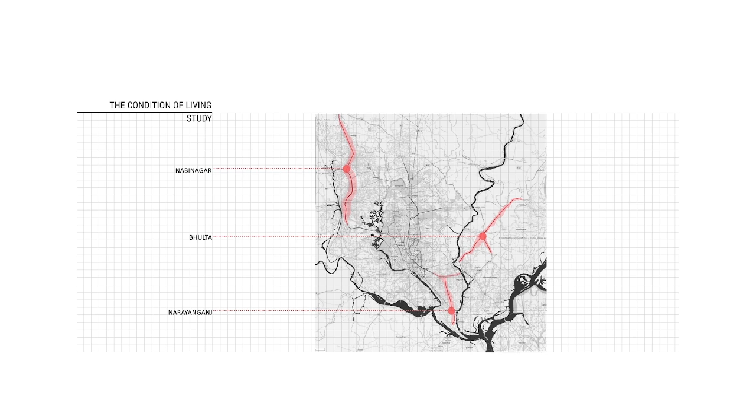After studying three main industrial belts, we can learn garments workers and their family members generate extra economy to maintain a better living condition for themselves.

If we consider the COVID situation, we can learn that about 40%, which is 1.6 million in number of workers, moved to their village for not being able to afford their living cost.

By studying their homestead, we can learn that several people are dependent on a particular garments worker, and they bear the monthly expenses and try to help out the family by involving in different works.

If we look at their economic pattern, their money goes directly to the market, which never comes back. We can turn this to circular economy for their economic growth.

If another unit is being proposed for extra economy, then the cost will arise. By sharing time-based use of those unused common spaces, they can be benefited.

Here, we can see what types of extra facilities they can have, how much space we need for a bed for 2 persons, and how much we need for other furniture. The answer is 11 feet 2 inches and 10 feet 4 inches.

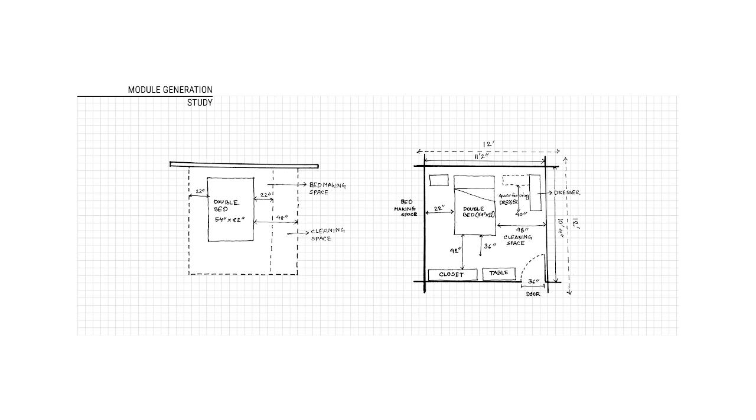To reduce the construction cost, we need to separate it into a 3 feet module, then the unit forms about 12 feet by 12 feet. Here, the panels for walls, windows, and doors are made of CI sheet because of the availability of these materials. Here, we can see the space of one unit.

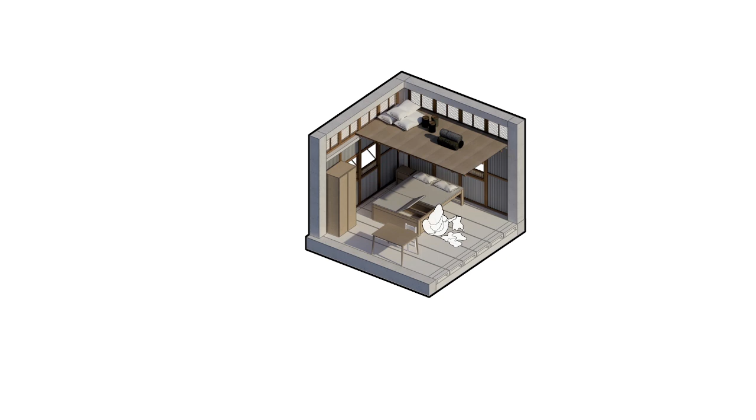Large storage space is needed for pandemic situations, that's why 2 layers of space are added. When 2 units are shared between themselves, some common spaces will be created which can be used for a different purpose. Floors are also considered as a module so that it can be made easily.

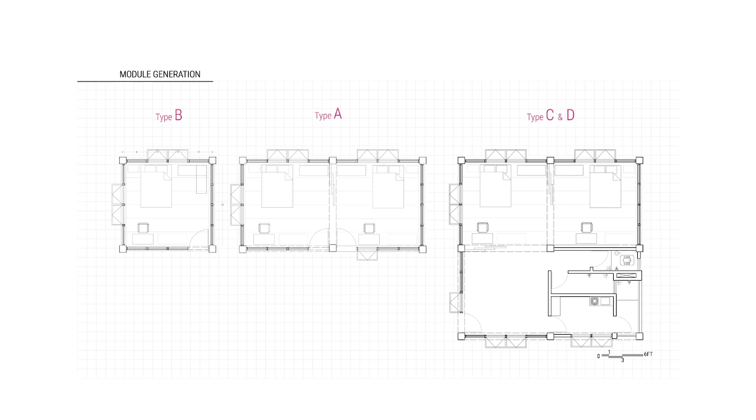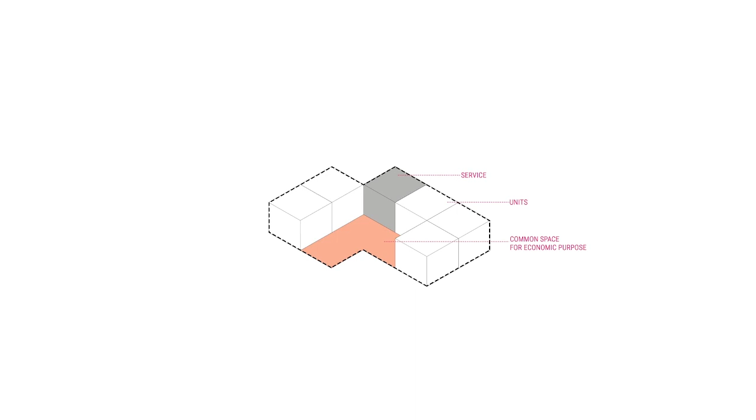Shared service is the central point so that the units can be arranged in the perimeter of this center to create some common space for economic purpose.

When they live in their village, there is some case of access from one house to another. That makes an easily accessible circulation. From this point of view, the vertical connections are here also made just like their native practice.

To generate some extra economy, here they sell their own sewing clothes. So there is some economic pattern, and the panels can be used as an extra economic pattern or source for them.

Now my site is located in a growing industrial belt and this belt is being served by this particular zone. In further, here EPZ and other garments factories can be increased in a huge number.

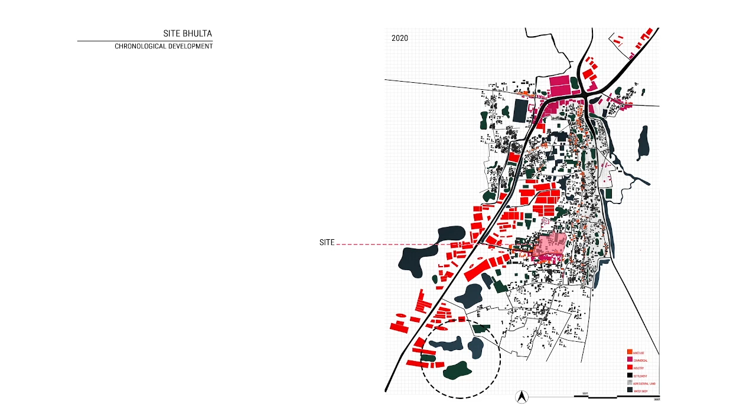This economic plan is the most important part of this project. Here we can understand what kind of role architects have in this type of project.

If it costs 100 crore taka to build the housing, the landowner can also go through a process by sharing the land with garments owners at 5% interest for 10 years. These loans will be given by JICA, IDCOL, or the Bangladesh government.

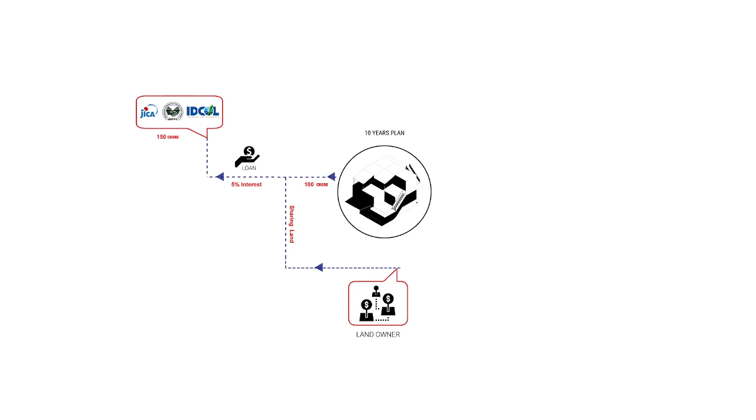But how can we pay this 150 crore taka? If we look at the worker house allowance, the monthly salary of 4 to 5,000 workers is 1.5 crore. It stands at 18 crore a year. From that 18 crore, we can take 15 crore in 10 years. The 150 crore taka can be paid.

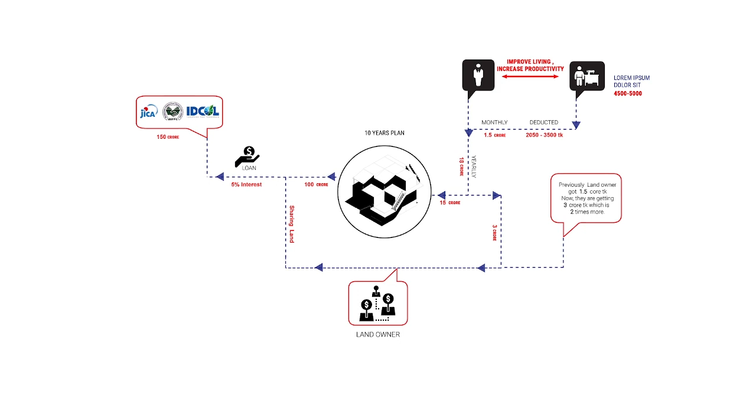The remaining 3 crore taka can be shared among the landowners. As a result, workers are getting a better place in their house allowance, their living is improving, and the garments owners' production is increasing.

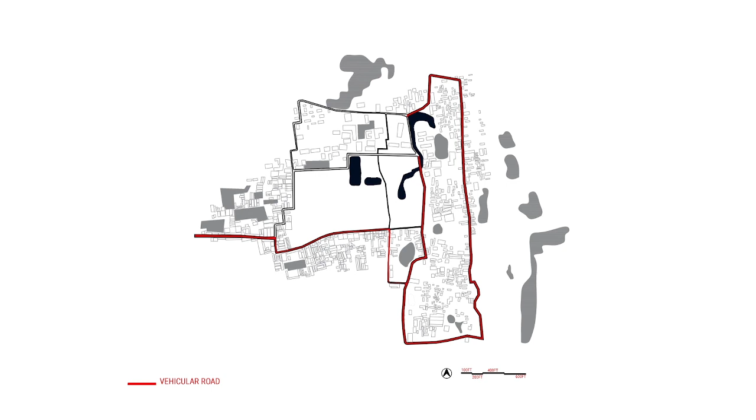We can see the vehicular accessibility around the site. The road has been moved around the site to increase vehicular accessibility. If we look into the Mouza map, we can understand the current road pattern and which places can be shared.

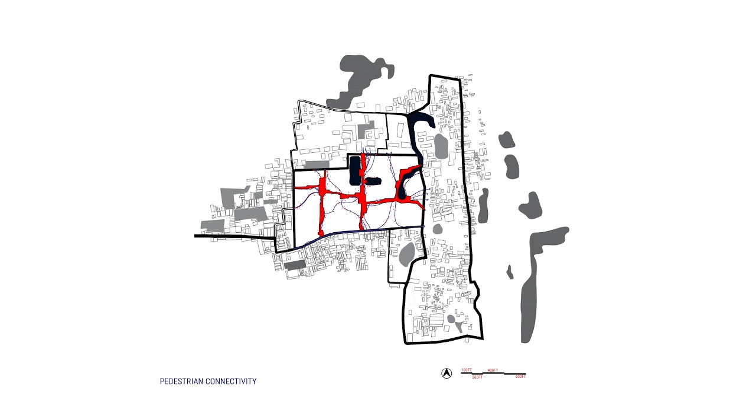From the study, we can see where people are gathering more and by which road they are moving. The main spine road is generated from that activity pattern. The activity pattern of the spine road can be seen here.

Later the modules are installed, and that's where my secondary road networks come from. This is the final stage of the master plan.

Let's take a look at the main spine road. Let's see what kind of activities are going on. We can see the connections in multi-layer, how the shops and living units will connect with the roads.

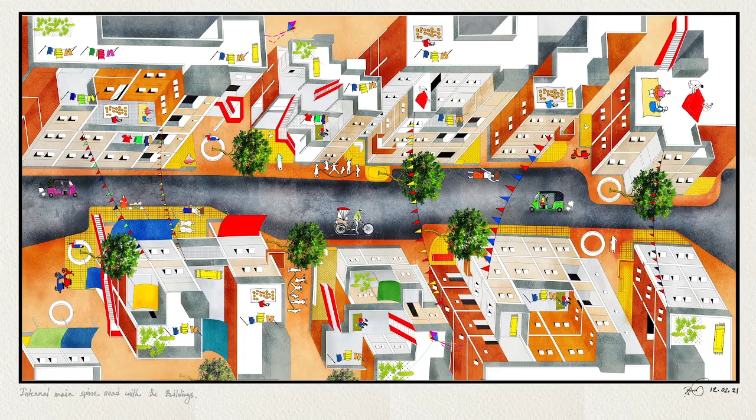Now we can see the axonometric view of a cluster. It shows how these roads are connected, how the economic zones are connected with the markets, how the multi-dimensional connection is taking place through the vertical connections.

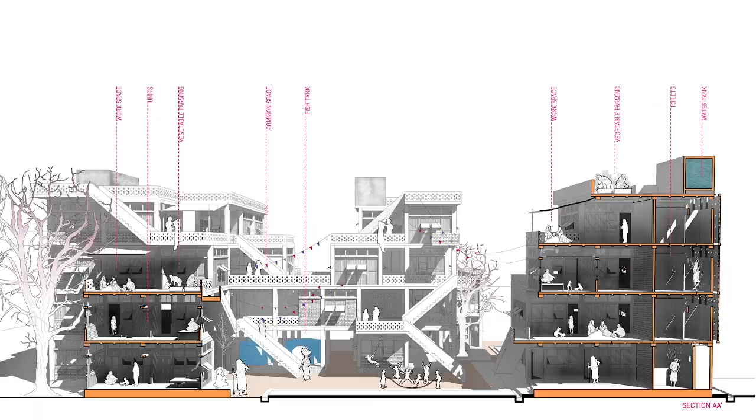In these sections, we can see the connections of workspace, living unit, courtyard, and vegetable gardens. Here we can see how the alleys are opening into the courtyards.

The open spaces are being used as playgrounds for children. They will be used as community space as well.

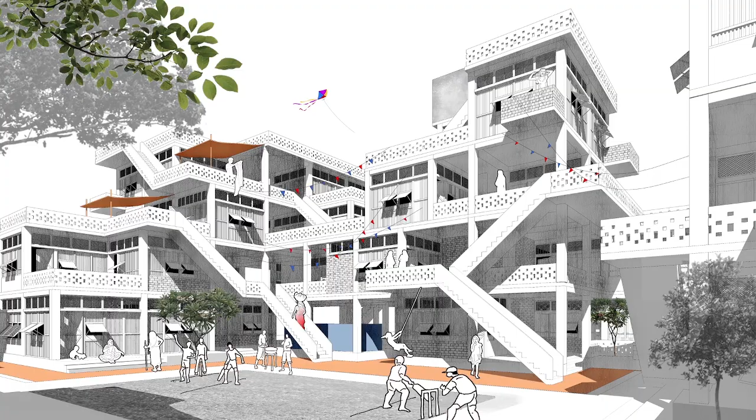Workspace and shops are very important in this economic model. Little things like the way they use the shops have been considered in their design. The module can be added to become a big shop. That means there is flexibility.

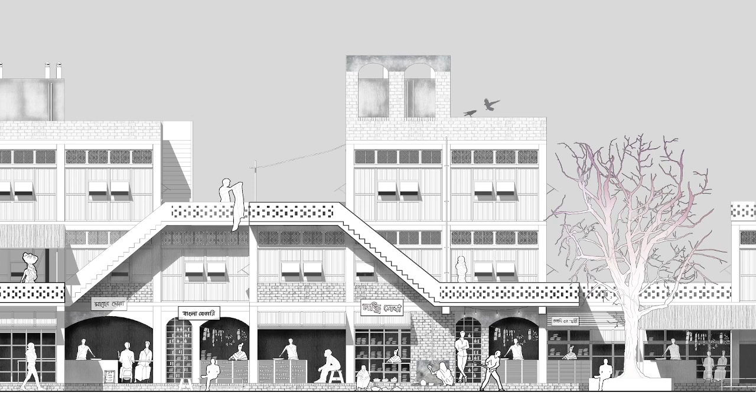The elevation of this economic zone shows what kind of shops there can be, how the activity has been used in this design, how it's being connected to the above units. Looking at the sections, we can understand more about the connections of the roads and units with the shops.

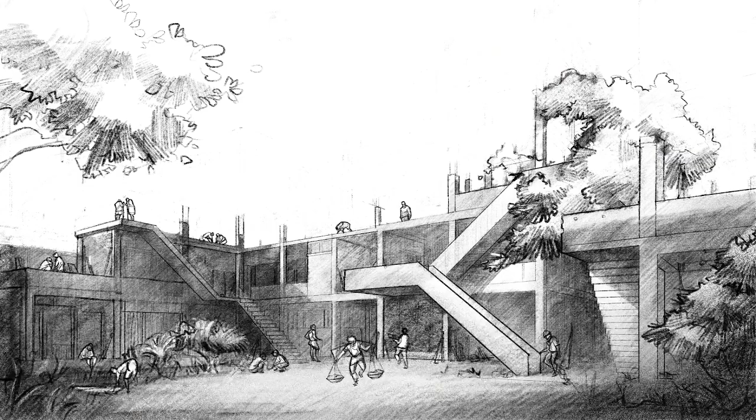So, I will conclude with this. We want to see the smiles on their faces again. Thank you.